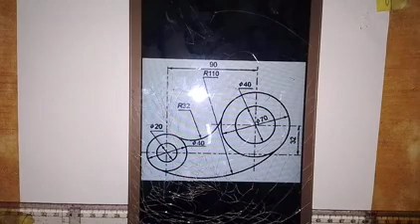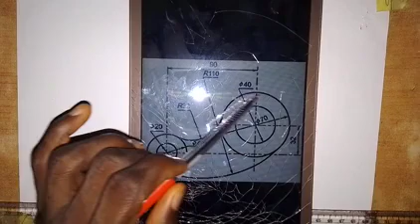Here we're going to be working on this problem that has to do with the use of the principles of tangency. Looking at what we have here, we just need to replicate what we see here. So we have the diameter of this small circle to be 40 millimeters. For this big circle, diameter is 70 millimeters.

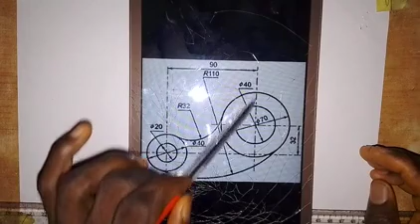And then for this small circle here, the diameter is 20, while this circle here diameter is 40. The radius of this arc is 32. The radius of this arc is 110. The center distance of this circle and this circle on the horizontal is 90. And then the vertical center distance is 32.

So we are going to make use of these dimensions to replicate this object. So let's start and see how it goes. First of all, we start with a horizontal center line. So I will draw the horizontal center line. Okay, so it goes like this. Okay, so we have this.

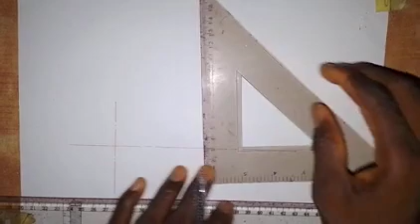Then the next thing I'm going to do is fix a vertical center line here. So this vertical center line. And then I will now take a measurement of 90 millimeters from here, which is the distance between the centers of the circles. So this is 90.

At this point I will draw a vertical center line that will be longer than this one. So I will come down like this. Alright, so this is okay. Now to draw this center line, we have to take a measurement. We take 32 millimeters up from here. So this is 32. Here I have 32 millimeters.

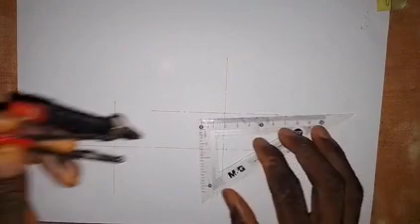So I will draw a horizontal center line at this point. Alright, so we have this now. So we go on and draw the circles. The big circle that we have on this side, the diameter is 40. So I'm going to take 20 millimeters. I want to draw the outer circles first. So we take 20 millimeters and make use of this center, and we draw the circle like this. Okay, so we have the circle here.

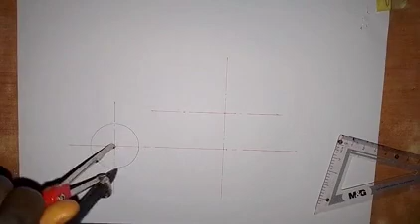This is the outer circle that the arcs are connected with. Then for this circle here, the diameter is 70. So we take 35 millimeters. So here we have 35. We put the pinpoint here at this point and we draw a circle like this. Alright, so we are really working on these ones because these are the two circles that the arcs touch.

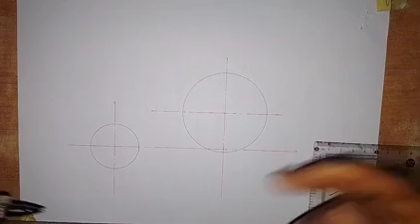Okay, so let's first of all produce the arcs. Here the radius of this is 32. So for us to draw this arc that will touch the external part of these two circles, or these circles will touch this arc on the external part. Okay, all right.

My tab is dead. That's why I have to put on my laptop.

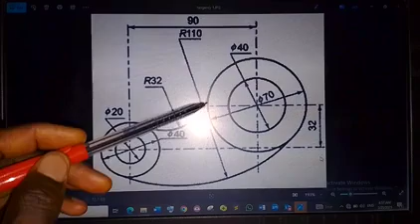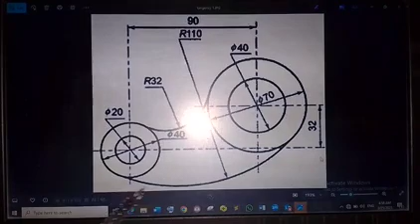Okay, so we want to draw this arc now. As we have drawn the two circles, we want to draw this arc, and the radius of this arc is 32. These two circles are touching the external part of this arc. Unlike this one, where the two circles are touching the internal part of this arc. But we are working on this first. So we want to draw this arc here, that these two circles will touch its external part.

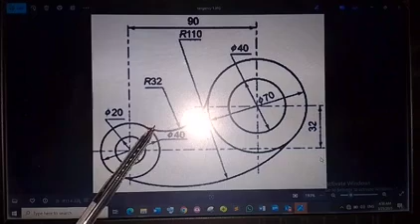So what can we do for that? We need to do a simple calculation, and I'm just going to explain it. I've done this several times. The calculation is that we are going to add the radius of this circle and this radius together. That is 20 plus 32, which will give us 52. So take note of that. 20 plus 32 will give us 52, as the radius of this circle is 20.

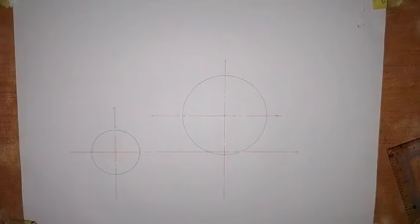So 20 plus 32 will give us 52. So we add that 52. So let's quickly work that out. So we are to take a measurement of 52 millimeters for this circle. So we take 52 millimeters here. Okay, so this is 52 millimeters. So we put the pinpoint here, and then we draw this arc like this. Okay, so we have this arc.

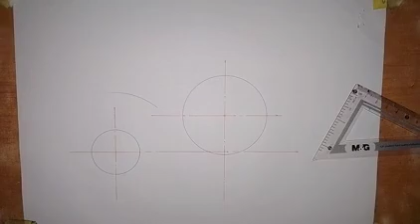So next, we also come for this circle that we have here. So the radius is 35. So 35 plus 32, that will give us 67. So we take a measurement of 67 millimeters on the ruler with the compass. So this is 67 millimeters. Okay, so we have 67. So put the pinpoint here, and then you draw an arc here.

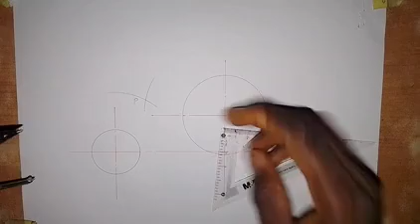Okay, so now this is the center of arcs. So let me call it center of arcs P. So what we are going to do now is to take the 32, the radius of that arc here. So we take 32 millimeters. So this is 32 millimeters. Okay, so we put the pinpoint here at point P. So it will touch this part of the circle, and then we draw. So just go on and draw like this. Okay, so this is how it will be.

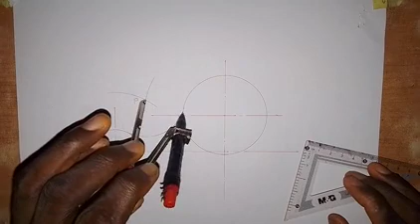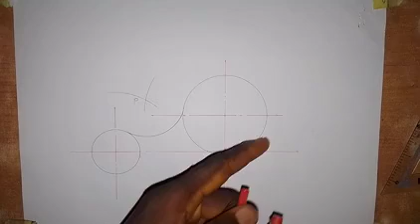All right, so for the other one, where these circles touch inside, the radius is 110. So we are going to also do a simple calculation here. So in this case now, we are going to do subtraction. We are going to subtract 20, the radius of this circle, from 110, the radius of that arc. So if we subtract 20 from 110, that will give us 90.

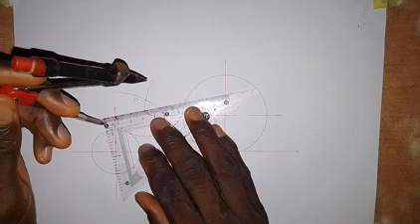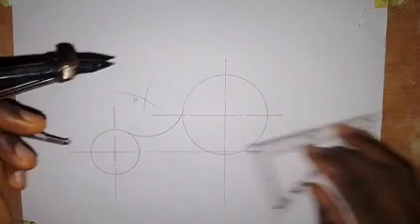So we take a measurement of 90 millimeters. So this is 90 millimeters here. All right, so this is 90. So put the pinpoint here. Okay, then draw an arc up here like this.

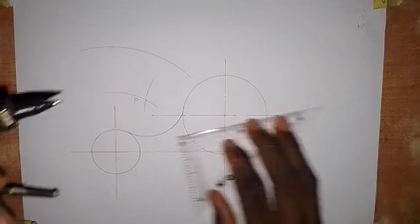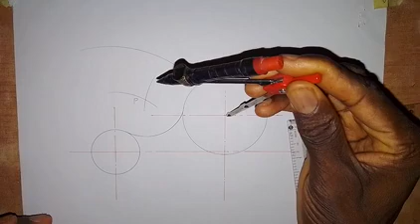Then the radius of this one, which is 35. So we are to subtract 35 from 110, and that gives us 75. So we take a measurement of 75 millimeters. So this is 75 millimeters here. Okay, then we put the pinpoint here. Then we draw an arc. All right, so here we have the center of arc Q, in case you are asked to indicate that.

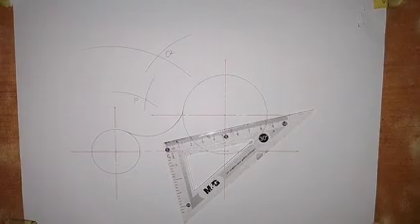Okay, so we now take the radius of that arc, which is 110. So take 110 millimeters. So I can take it here on this. All right, so take 110 here. So this is 110 millimeters. So here we have 110 millimeters here.

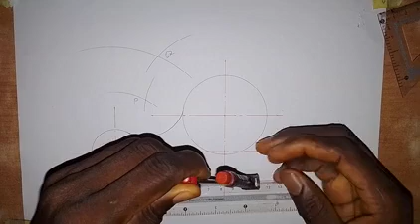So we put the pinpoint here at point Q, as you can see it here. So it touches this part of the circle, and then when you go like this, it will touch this. So it's as simple as that. So we draw from here, so it goes like this. All right, so that's it. So we have done it.

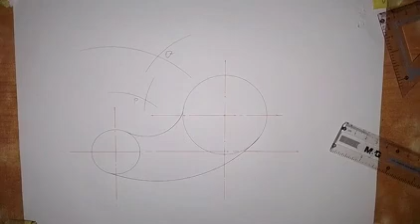So now, the inner circle, the one here, diameter is 20, so the radius will be 10. So we take 10 millimeters. That circle's radius is small, so I have to manage to draw the circle. Okay, so it goes like this. So just take it easy. All right, so we leave it like this.

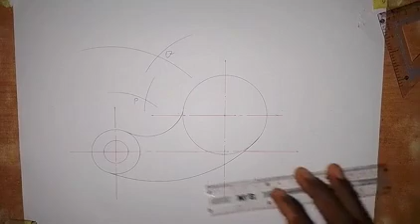So then the other one, the circle that we have here, diameter is 40, so the radius is 20. So we take 20 millimeters here, and we put the pinpoint here. So then we draw the circle. All right, so this is how it is given to us, and we have replicated it. It's as simple as I've done it here.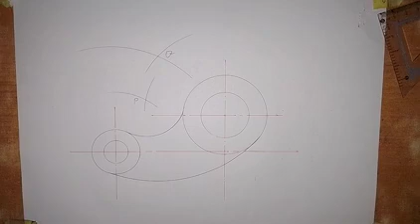Do not forget the calculation that we did. Without the calculation, you can't get it done like this, and you cannot use a French curve for this. So you have to do the calculation to be able to draw the arcs perfectly to touch the circles. Thank you. Keep on practicing, and God bless you.